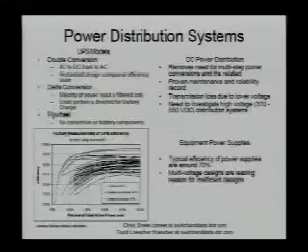The third major component of inefficiencies in data centers is in the power supplies for the equipment themselves, based on the multi-voltage regulations within the power supplies or component systems. You'll see anything from 1 to 12 volts. By eliminating that, if you were able to get to a standard voltage across the entire system component, you'd really be able to take out the inefficiency from that particular step in the process.

That's your N. If you want redundancy, N plus 1, 2N, you need to make sure you've got plenty of that, because you're hitting those densities. And in today's world, we're seeing 5 times that. Now, you don't really see 350 watts per square foot across 1,000 square feet all the time, but you'll see pockets of that throughout the data center.

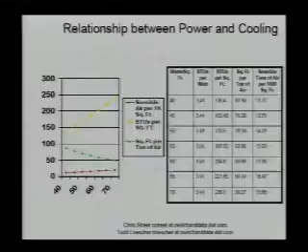So you've got to address that issue. So what can you do? This is really the most important thing, because I can show you all the nice, pretty charts and pictures and everything else, but you need to take a look at it from two different perspectives: from a design guidelines perspective when you're looking at building out data centers.

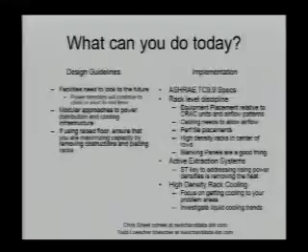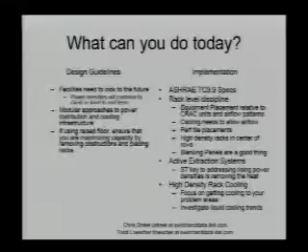You need to look to the future, obviously. The power densities, there's no end in sight in terms of short to midterm path, and they're going to continue to climb. I haven't seen any forecasts that power densities are coming down anytime soon in the next 5 to 7 years, probably.

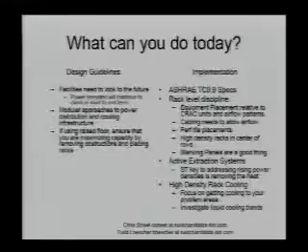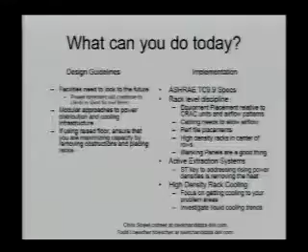Modular approaches to power distribution. So then your data center, you've got to be flexible to put the cooling where you need it and extract the heat out from where it is, and plan along with that. If you're using the raised floor, you've got to ensure you look underneath the tiles and make sure there's no big pipes or wads of cable going across there.

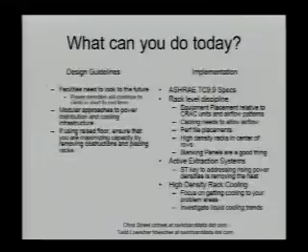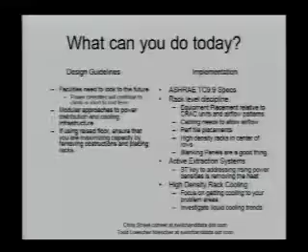In terms of actual implementation, take a look at the ASHRAE Technical Committee 9.9 specs released last year — great hands-on guidance in terms of implementation. The specs are technical industry specs, so you'll see them implemented a little differently site to site or organization to organization, but they're very critical for implementing and watching your power and cooling needs within the data center.

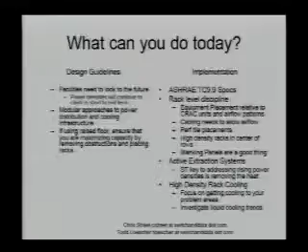At the rack level, you've got to do the correct placement relative to the CRAC units and the airflow patterns of the gear going in there. If it's front-to-back or top-to-back gear, you've got to make sure that's consistent throughout.

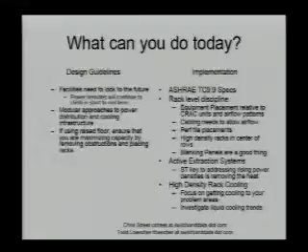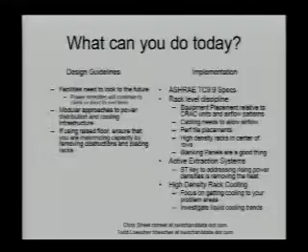Fix your cabling, please. Perf tile — put the perf tile in the cold aisles. Let the hot aisles be hot. That's the intent. High density racks — good thing is to put them in the middle of the rows.

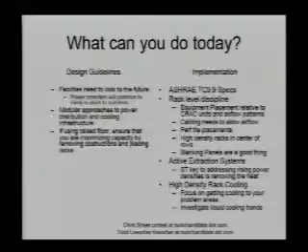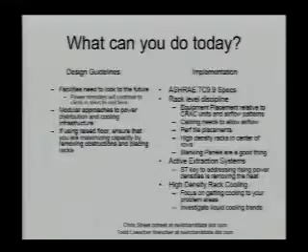Depending on the length of the rows and the placement relative to the CRAC units, but pretty reasonable for ten cabinets, ten racks, etc. You can put them in the middle, and spend the extra $250 for the blanking panels. Again, it's kind of like the cabling — an easy thing, but works very well.

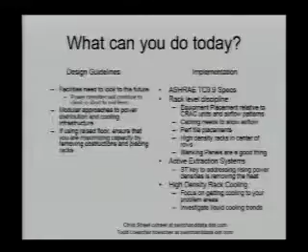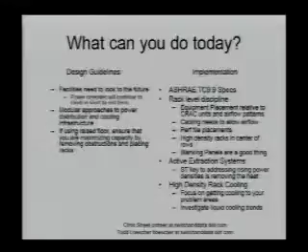If you've got little hot spots, use active extraction, or explore that — this is just sucking the hot air out. Again, the concern in terms of inefficiencies and the generation of heat is to get the heat out. It's not necessarily hard to get the cool air in — it's getting the heat out of the hot areas.

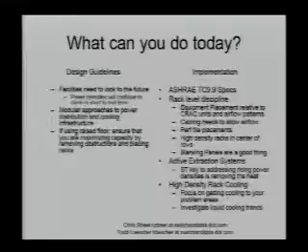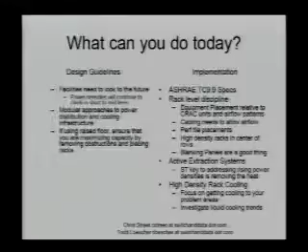In terms of rack cooling, take a look at some of the liquid cooling that's coming online. A lot of it's pretty interesting in terms of different vendors getting things out there that you can actually use and put in place, without requiring a complete retrofit of your data center. So that's the 7-minute talk.